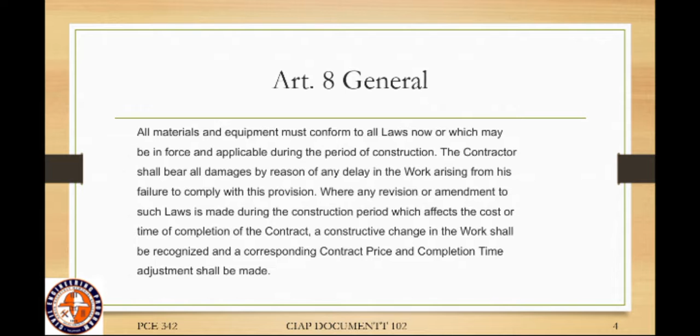Next, Article 9: Equipment. Equipment refers to tangible and durable assets that help in the production of other goods and services. Examples of equipment are machinery, tools, devices, and so on. Materials, on the other hand, form the base of the product.

Equipment has two categories: the quality of equipment and equipment substitution. For quality of equipment, in order to establish standards of quality, the owner in the detailed specification may refer to certain equipment by name and catalog number. This procedure is not to be construed as eliminating from competition other products of equal or better quality by manufacturers where they are fully suitable in design.

So for quality of equipment, there is a procedure that is followed. Each equipment or quality of equipment has a name, catalog, and specification for where it should be used in constructing a building.

Next is equipment substitution. The contractor shall furnish the complete list of proposed substitutions, preferably prior to the signing of the contract, together with such engineering and catalog data as the owner may require.

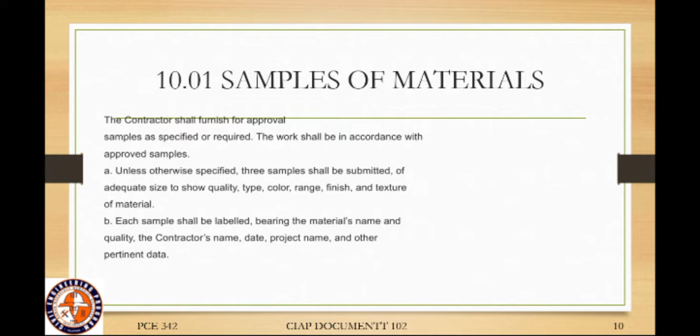For samples of materials: the contractor shall furnish for approval samples as specified or required. The work shall be in accordance with approved samples. Unless otherwise specified, three samples shall be submitted of adequate size to show quality, type, color, range, finish, and texture of materials. Each sample shall be labeled bearing the material's name and quality, the contractor's name, date, project name, and other pertinent data.

Where the specification requires the manufacturer's printed installation directions, such directions shall accompany the sample submitted for approval. A letter of transmittal in triplicate from the contractor requesting approval shall accompany all sets of samples. Materials requiring prior approval of the owner shall not be ordered until such approval in writing is given by the owner. All materials shall be furnished substantially equal in every respect as the approved samples.

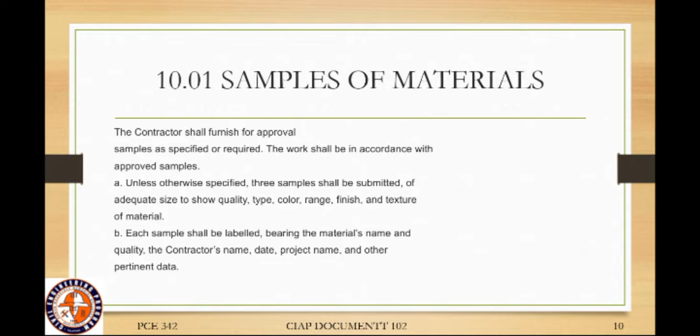So for samples of materials, for example pipes, steel, cement, and other materials needed in construction, samples are needed and must be labeled with their types, colors, and qualities. For samples of materials, it should include the material's name, the contractor's name, project name, and other pertinent data.

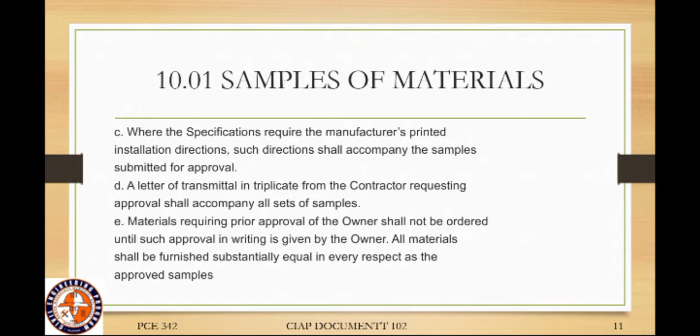So sa trade name, materials, and substitutes, kailangan gyapon nimo siya og approval of the owner bago nimo siya magamit. So dili gyapon siya kagamit sa mga materials na imong naabot na mga materials kung wala gyapon approved from the owner.

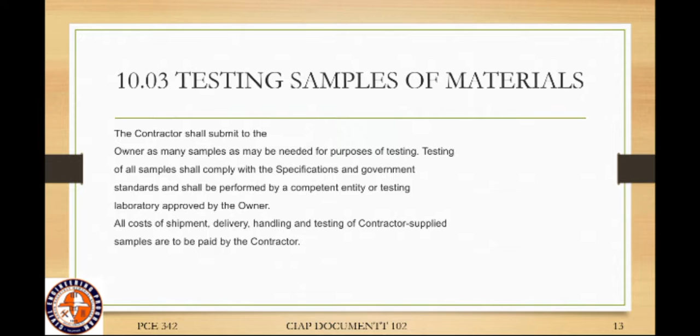Testing samples of materials. The contractor shall submit to the owner as many samples as may be needed for purposes of testing. Testing of all samples shall comply with the specification and government standards and shall be performed by a competent entity or testing laboratory approved by the owner. All costs of shipment, delivery, handling, and testing of contractor-supplied samples are to be paid by the contractor.

Next is quality of materials. Unless otherwise specified, all materials shall be new and their quality shall be of the best grade of their respective kinds, taking into account the nature of the project and requirements of the contract.

So quality of materials, kailangan maging quality of materials kay kunwari kung dili mao ang mga quality of materials sa imong gamiton, so ikaw lamang gyapon as a contractor, ikaw lamang gyapon ang naay responsibility ana kung naay any damages or mga mahitabo sa mga workers.

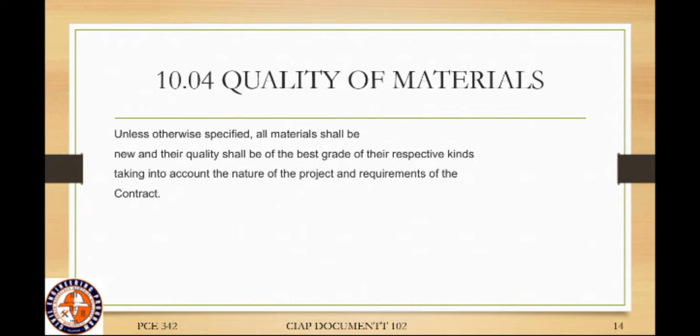Next is storage and stockpiling of materials. The owner shall provide the contractor, at or near the project site, sufficient space for the contractor and subcontractors to use for storage of their materials and for erection of their sheds and tool houses.

All cement, lime, and other materials affected by moisture shall be stored on platforms and protected from the weather. The materials shall be stored so as to ensure the preservation of their quality and fitness for the work. Stored materials shall be located so as to facilitate prompt inspection. Should it be necessary at any time to move materials, sheds, or storage platforms, the contractor shall do so at his own expense.

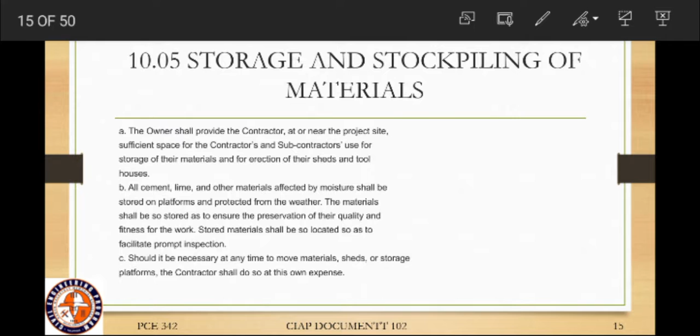So storage and stockpiling of materials, naman kita yung mga materials na kunwari cements na dapat dili mabasa, mga bakal na dapat dili makalawang, mga nails, mga isa pa ang mga nang dapat maghimo og temporary shed for the materials na dili sila ma-affected sa weather.

Next is defective materials. All materials not conforming to the specification shall be considered defective. The contractor shall remove or replace defective materials when ordered to do so by the owner. Upon the contractor's failure to do so, the owner may remove and replace them and deduct the cost of removal and replacement from any money due or to become due to the contractor. No materials, the defects of which has been subsequently corrected, shall be used until the owner's approval is given.

Should the specification, drawing, special provision, and supplementary specification fail to provide any detail or description concerning the nature or quality of the work to be performed, it should be understood that generally accepted construction practice shall be followed.

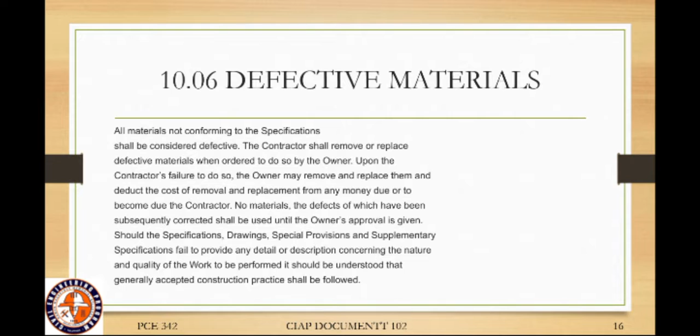So if naa'y mga defective materials, dili na dapat hawaon or kuaon or palitan, kumbaga, kay naa na ninyo kung pila na tong inyong na-palit na, upon request in writing ba. Then if you're going to remove or replace the defective materials, kailangan nimo og approval again from the owner. If ang owner dili mag-approve na hawaon or palitan ang materials, dili nimo siya palitan or hawaon.

Next is imported materials, fixtures, and equipment. The contractor, taking into consideration the completion time, shall make timely arrangements for the purchase and delivery of all specified imported materials, fixtures, appliances, and equipment in order to avoid delay in the completion of the work. No extension of time shall be allowed if due to negligence or inadvertence of the contractor such imported items arrive late.

So sa mga gina-import na mga materials, dapat ang contractor daw is permanently gina-follow up ang mga materials so that ang mga materials dili ma-delay niya magamit siya on time if needed.

Next is owner's approval. Unless specified to the contrary or unless the contractor's submission is deficient, equipment, samples, or material submissions shall be acted upon by the owner within 7 working days of submission by the contractor.

Next, Article 11: Materials, equipment, fixtures, appliances, and fittings furnished by the owner.

Materials, equipment, fixtures, appliances, and fittings specifically indicated in the contract shall be provided in accordance with the owner-approved construction schedule. Materials furnished by the owner shall be deemed acceptable for the purpose intended.

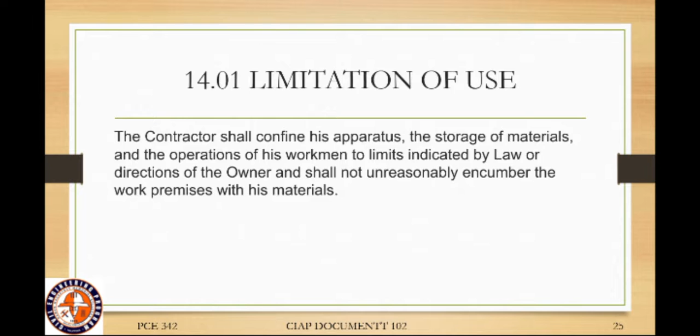Article 14. Premises and temporary structures. Use of premises. Premises refers to a building together with the land on which it is situated and any outbuildings. Limitation of use: the contractor shall confine his apparatus, the storage of materials, and the operation of his workmen to limits indicated by law or direction of the owner, and shall not unreasonably encumber the work premises with his materials. Safeguard for structure: the contractor shall not load or permit any part of the structure to be loaded with a weight that will endanger its safety. The contractor shall enforce the owner's safety instruction regarding signs, advertisements, fires, and smoking.

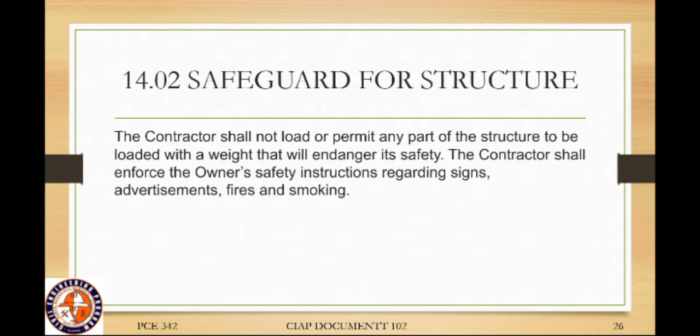Article 15. Temporary structures and facilities. Temporary office and contractor's building. The contractor shall, taking into account the location and size of the site, at all times provide and maintain an adequate weather-tight temporary office with necessary basic facilities such as water, light, and telephone. When practicable, or depending upon the nature and complexity of the project, the owner may require the contractor to comply with other requirements for temporary structures and facilities as provided for in the contract.

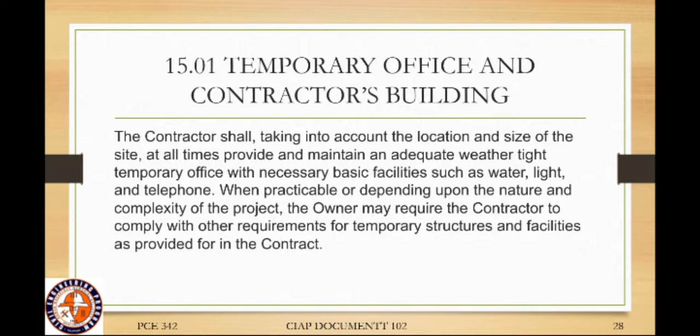Next is temporary housing for workers.

The temporary building for housing men or the erection of tents or other forms of protection will be permitted only at such places as the owner shall designate, provided, however, that if no particular area is designated, the contractor may use his own discretion in determining such areas in consultation with the owner. The sanitary condition of the grounds in or about such structures at the project site shall at all times be maintained in a manner satisfactory to the owner. Nobody shall be allowed to sleep or cook within the building line of the project under construction.

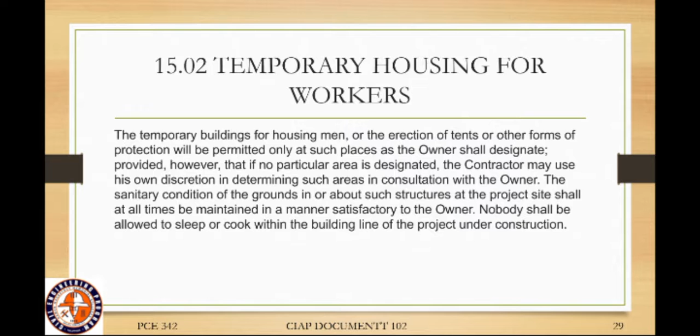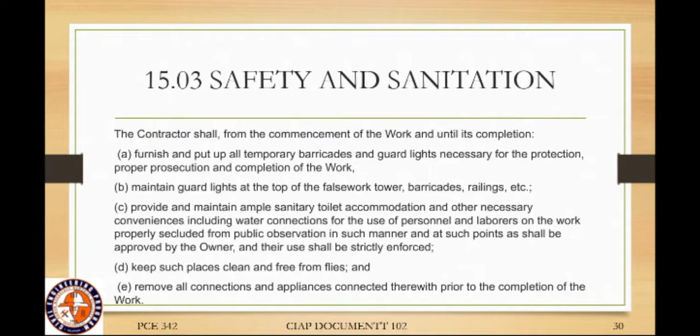Next is safety and sanitation. The contractor shall, from the commencement of the work until its completion, furnish and put up all the temporary barricades and guard lights necessary for the protection, proper prosecution, and completion of the work. Maintain guard lights at the top of the false work tower, barricades, railing, and etc. Provide and maintain ample sanitary toilet accommodation and other necessary conveniences, including water connection, for the use of personnel and laborers on the work, properly secluded from public observation in such manner and at such point as shall be approved by the owner, and their use shall be strictly enforced. Keep such places clean and free from flies, and remove all connections and appliances connected therewith prior to the completion of the work.

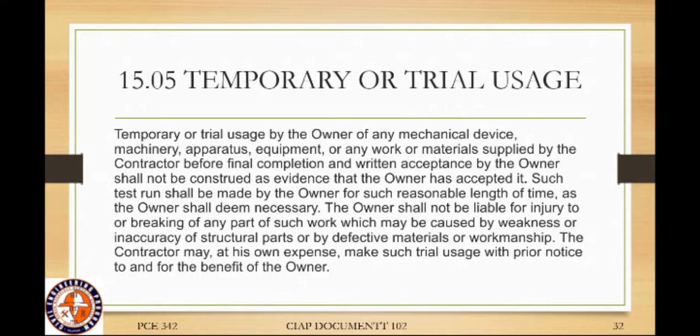The contractor may, at his own expense, make such trial usage with prior notice to and for the benefit of the owner.

Article 16. Protection of work and property. Protection of work and owner's property.

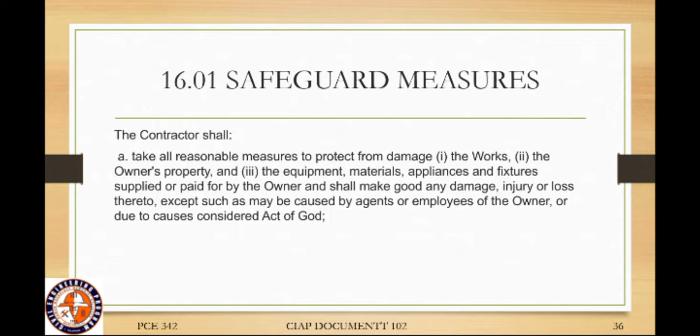Art 16. Safeguard measures. The contractor shall take all reasonable measure to protect from damage the works, the owner's property, and the equipment, materials, appliances, and fixtures supplied or paid by the owner, and shall make good any damages, injury, or loss thereto, except such as may be caused by agents or employees of the owner or due to causes considered act of God.

Safeguard measures: provide reliable and competent watchmen to guard the site and premises. Provide all doorways with locks under his control and lock such doors at the close of each day's work. Provided, however, that if the owner deemed the security service inadequate or incompetent, the contractor shall increase or change the security personnel.

Prohibit smoking at the site, and signs to this effect shall be posted conspicuously. Prohibit fires built on the site except by the express consent of the owner, and provide and maintain in good working order an adequate number of firefighting equipment, and such equipment shall not be used for any other purposes.

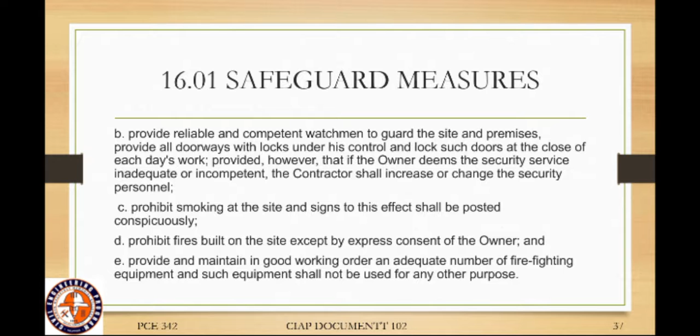Old materials. All old materials of value as determined through a joint inventory by the owner and the contractor found at the worksite shall be carefully stored at the place designated by the owner, and the contractor shall be responsible for the safekeeping until final acceptance of the work.

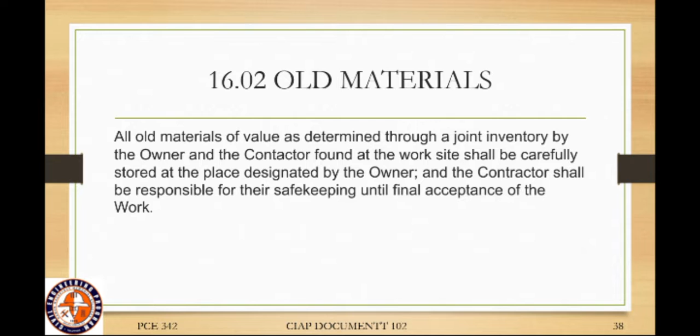Next is trees and other plants. Existing trees, plants, shrubs, etc. which are to remain at the site shall be boxed and otherwise protected from damage. No trees within the site located outside building line shall be cut or removed without specific approval from the owner.

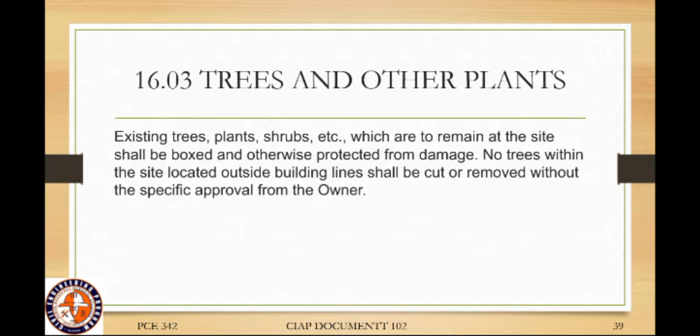When specifically included in the contractor's scope of work, all trees and other plants that need to be transplanted elsewhere shall be done by the contractor in accordance with instruction of the owner.

Then, damage of trees, plants, shrubs, and sidewalks, etc.

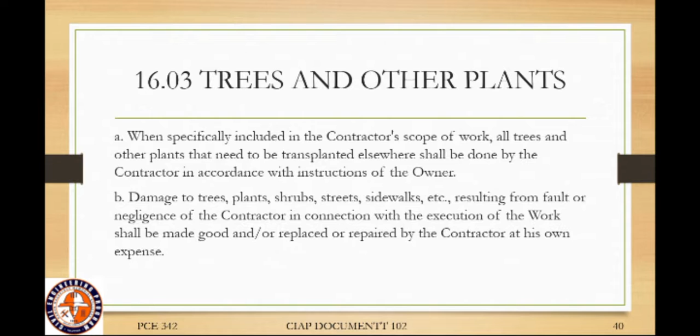Resulting from fault or negligence of the contractor in connection with the execution of the work shall be made good and or replaced or repaired by the contractor at his own expense. So, kung mamali gyud ikaw, kung wala ka nang sunod sa gihatag sa imo na rule or instruction sa owner, ikaw lang gyapon as a contractor, imo lang gyapon tong responsibility. So, ikaw lang man gyapon magbayad ato, ikaw gyapon mag-ano sa mga expenses. So, dapat follow the instruction, follow gyud nimo ang instruction sa owner para makalikay ka sa mga expenses na dili dapat hatagan og importansya.

Next is drainage. It should be necessary in the prosecution of the work to interrupt or obstruct the natural flow of rivers or streams, the drainage of the surface, or the flow of artificial drains. The contractor shall do so in such a way that no damage shall result to either public or private interest for his neglect to provide other means of drainage for any existing natural or artificial drainage which he may have obstructed and interrupted. The contractor shall be liable for all damages which may result therefrom.

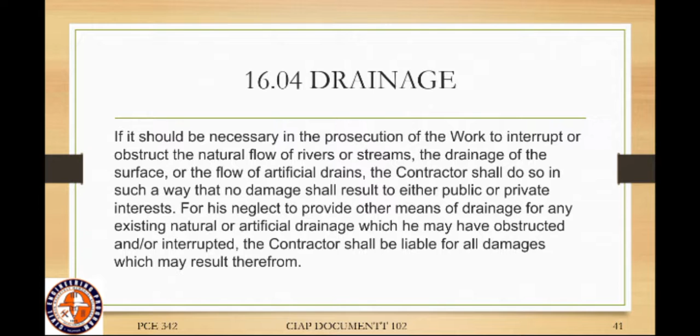Protection of adjacent property and existing utilities. Article 17, Contractor's responsibility. The contractor shall adequately protect adjacent property as provided by the law and the contract. Any neighboring property or building which may be jeopardized in any manner must be thoroughly and substantially protected against damage during construction at the contractor's expense.

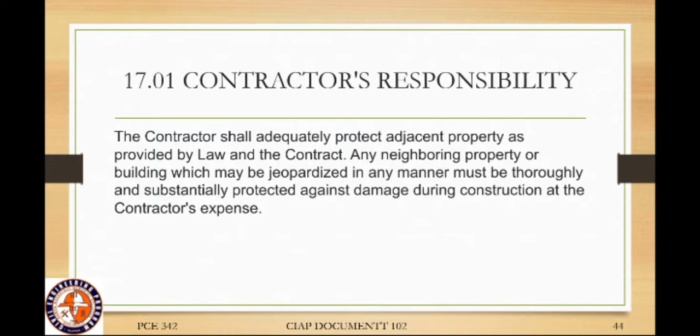So dere, kunwari, ang naa sa isa ka property, ka-damage ka sa pikas property, imuha tong responsibility na dapat dili madamay ang owner. Kunwari, example, sa building na ang workman nimo naa siyay nakadamage dito sa pikas property, nakadamage siya dito sa pikas property. So imo atong responsibility kay dili naman to apil sa inyong contract sa owner na makadamage ka sa pikas.

Next is, the contractor shall be liable for and pay for all damages to adjacent or existing utilities occasioned in any manner by his act or neglect or by that of his agent, employees, or workmen. So kung giingon sa mga damages na mabuhat o damages sa ilalom niya, kunwari mga workmen, mga laborers na nakadamage, siya lang gyapon ang naay responsibility ana. So siya gyapon ang magbayad, siya gyapon ang mangita og paagi paano niya ni i-resolve gamit ang iyang kaugalingong expenses o kung unsa man iyang idea para ma-resolve ni, para makalikay siya sa ano.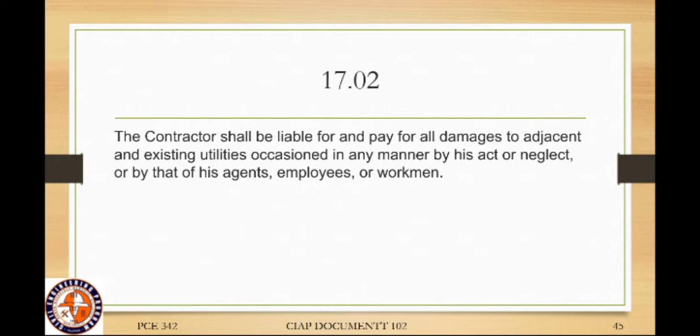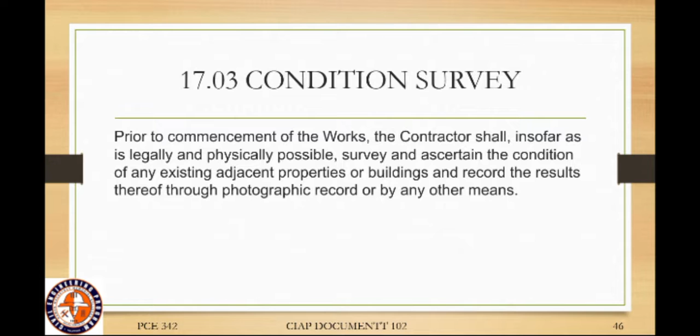Condition survey. Prior to commencement of the works, the contractor shall, insofar as is legally and physically possible, survey and ascertain the conditions of any existing adjacent properties or buildings and record the result through photographic record or any other means. So sa condition survey, dapat every time nga ginahimo ang imong mga laborers o workmen nimo, dapat permanente ka og record kay kung mangita ang owner kung unsa na ang nahimo sa mga tao nimo sa gipabuild niya, ipakita sa contractor kung asa na siya dapit nahuman, asa na siya nag-stop, pila na lang ka adlaw ang kailangan. Kaya kailangan nimo og mga records ug i-survey gyud nimo kada adlaw possibly kay para masayran kung nagtrabaho ba ang mga workmen nimo kada adlaw o wala.

So for example, if your workman or laborer gets injured, dili na siguro kailangan og approval sa owner nga motawag pa ka, 'hello sir, ang akong tao sir, kailangan ako mag-ano.' Dapat i-aksyonan dayon nimo kay para ma-lessen ang damage na cause sa injury niya. Dapat i-aksyonan dayon nimo, dili nimo siya pasagdan. Unsaon man nimo pasagdan siya, maghulat pa ka og approval sa owner.